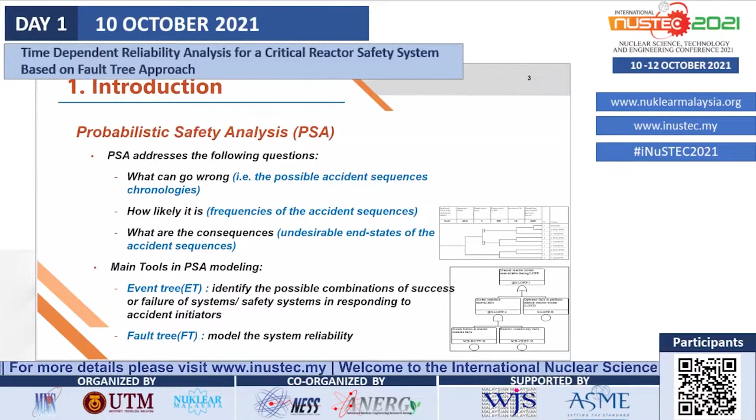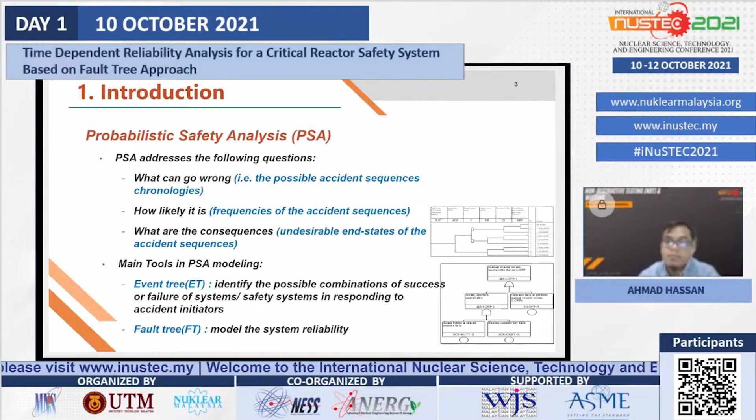And for the modeling tools in PSA, mainly there are event tree and fault tree. We use event tree to identify the possible combination of success or failure of our safety system or mitigation system in response to the initiation of the accident. And we use fault tree to systematically and logically model the reliability of our safety system or our mitigation system.

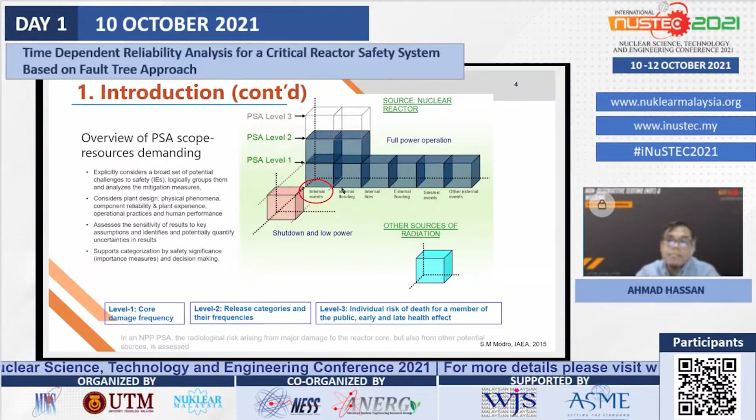And the axis pointing towards ourselves is the mode of the reactor operation if the PSA is performed for a nuclear reactor. And if we consider the inner box, which is the level 1 PSA during full power operation, and the cause of the accident is internal events, the common hazard that is usually thought of is the loss of integrity of the primary coolant boundary, meaning that the reactor is losing the coolant.

So during normal operation, the coolant is not only to transfer the heat, but it is also a protection for the nuclear fuel. So when there is a loss of coolant, or let's say a break, the amount of coolant will be reduced, and eventually, if the core is uncovered from the coolant, the core will become the source of hazards.

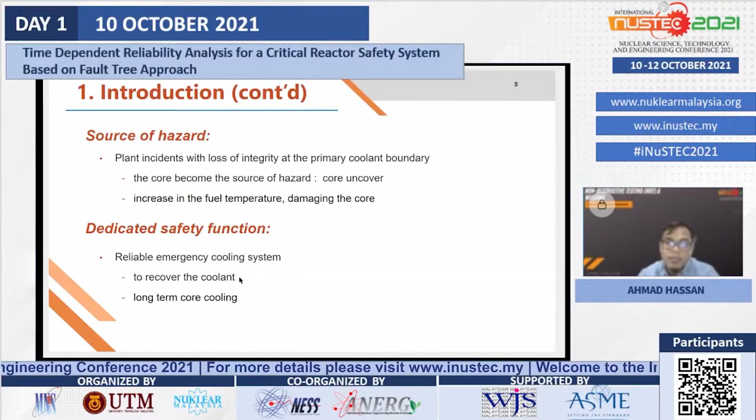Because we will experience the rise of fuel temperature, and after that, that situation will damage the nuclear fuel core. That is one of the reasons why for every plant there is a dedicated safety function to provide emergency cooling function, to recover the loss of coolant inventory, as well as to provide long-term cooling to remove the decay heat.

And so the motivation of this study is to look into the reliability, and specifically how the reliability changes as time goes by, of the emergency cooling system at a nuclear power plant. So this involves the failure mode and effect analysis for each component in the system, and then the construction of the fault tree and the quantification of the fault tree. In this particular study, the graphical construction of the fault tree and the quantifications are performed using the RiskSpectrum PSA

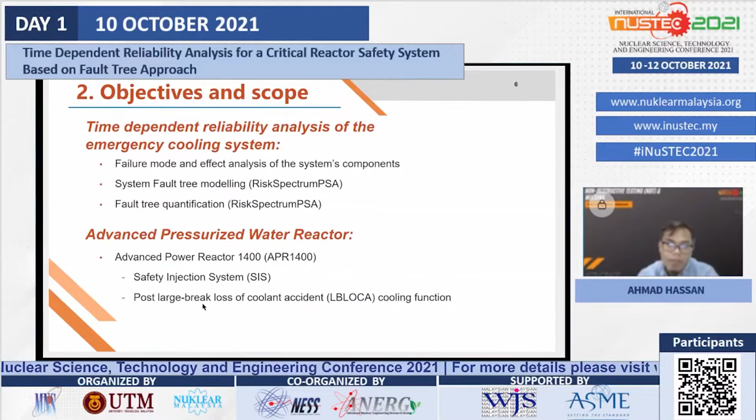computer software. We have selected an advanced pressurized water reactor, the Korean Advanced Power Reactor 1400, or APR1400, for its safety injection system. And the scenario that we analyzed is the post large break loss of coolant accident. So how does the SIS perform during this particular accident condition?

However, the success criterion for the long-term cooling after large break LOCA is that borated water must be continuously injected via train 1A and train 2B, because only at train 1A and train 2B, other than through the direct vessel injection nozzle, the borated water is also injected into the vessel through the hot legs. So from train 1A and train 2B, borated water is injected through the direct vessel injection nozzle as well as through the two hot legs of the reactor.

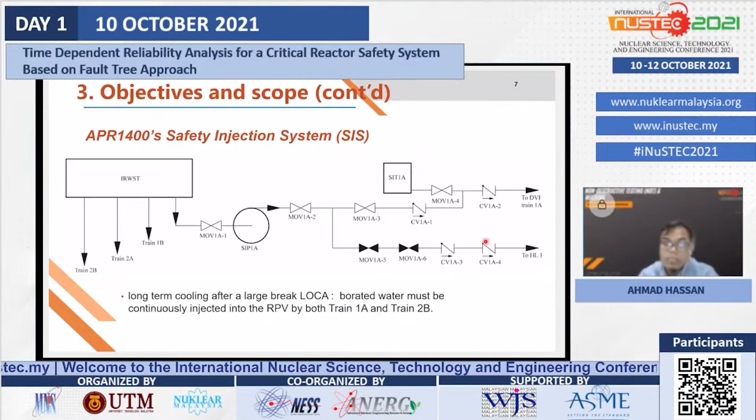Other than the IRWST, in the system there are also safety injection tanks. But for this particular analysis, we don't consider the reliability of the safety injection tank. Other than that, there are a series of valves, check valves, and also importantly, the safety injection pump. So the methodology involves FMEA, failure mode and effect analysis. This is to identify the relevant components, screen out the irrelevant components, and then consider the effect of the failure of each component on the functionality of the SIS during the post large break LOCA.

And for the fault tree modeling and quantification, we use the outcome from the FMEA. Then with the fault tree calculated, we can further evaluate the contribution from each of the basic events. And then also from the base fault tree, we try to look at the effect of operator recovery action on the reliability of the SIS.

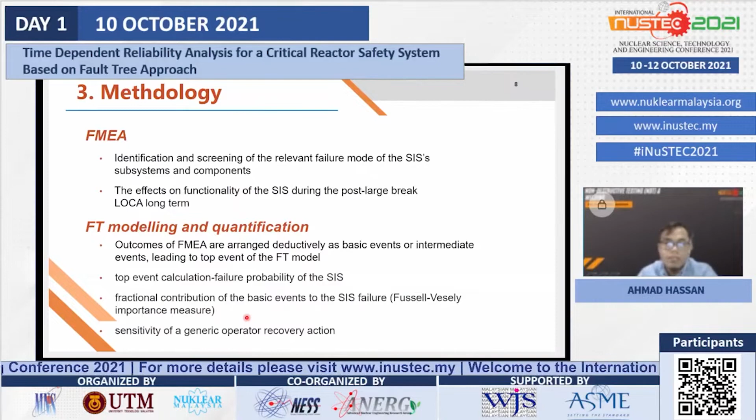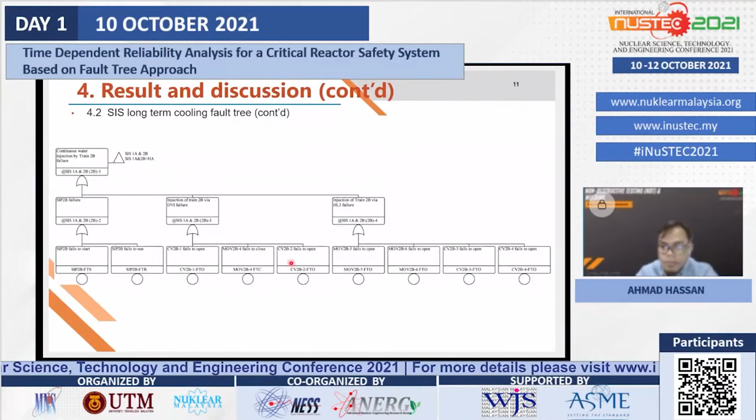So this intermediate event is connected to these three. And after the quantification of the base fault tree, these are the minimal cut set lists that are obtained, especially for time at 30 minutes after the initiation, and the top event. The failure probability of the system is this value,

and unfortunately, any single failure of the basic event will lead directly to the failure of the SIS, and this does not comply with the single failure criteria. And if you can see the top contributor, the safety injection pump failed to start, but in the long run, specifically at 5 hours, the first two at the top are replaced with still the pump, but a different failure mode, which is the fail to run.

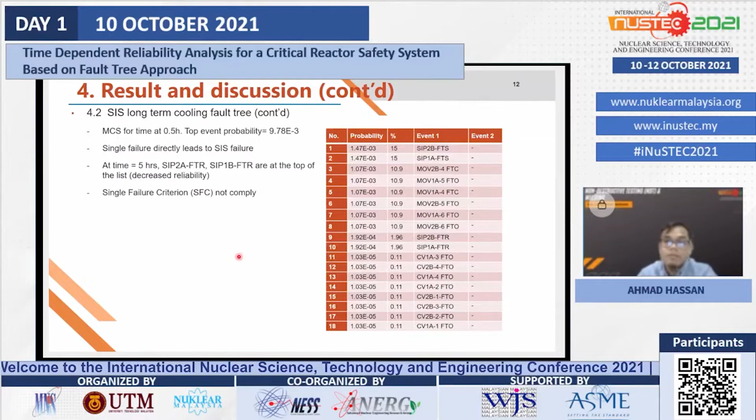Okay, because the fail to run of the safety injection pumps is increasing with time, whereas other basic events have constant failure probability. Okay, so this is the failure probability of the SIS with time, and specifically at 72 hours, the failure probability increases 6 times. Again, the same reason, because of the safety injection pumps fail to run.

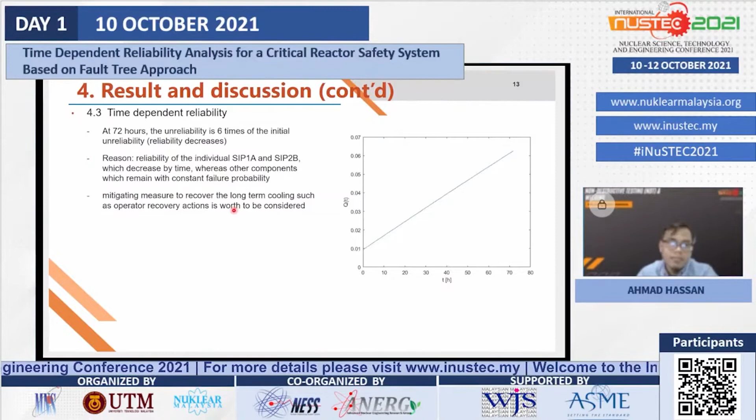Okay. So we can think of other measures to increase the reliability of the SIS, such as operator recovery action. I will come to the operator recovery action later. So now let's take a look at the Fussell-Vesely importance.

So by definition, the importance is the ratio of reduced unreliability or ratio of increased reliability when a basic event is completely reliable. It means that it does not fail at all. And particularly for the pumps, if we can find a way to make it not fail at all, the benefit is 100% increase in reliability. And for the other basic events, their values are not that significant. They are less than 1 per 1,000. So the same reason that I explained just now for this outcome.

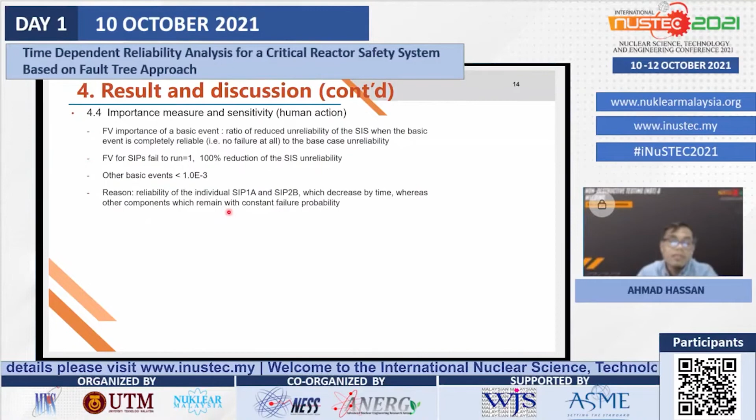Okay, if we consider a human intervention, human action, so this one, it is found out that the mean unreliability of the SIS decreases by 2 orders of magnitude, from 10 to the minus 2 to 10 to the minus 4, by introducing a nominal human performance, 0.011. This is the value from SPAR-H method. And we can see the minimal cut sets now.

We can see the compliance of single failure criteria. So there is no more single basic event that leads directly to the failure of SIS, and now we can see the combination of the human recovery action and the failure of the hardware.

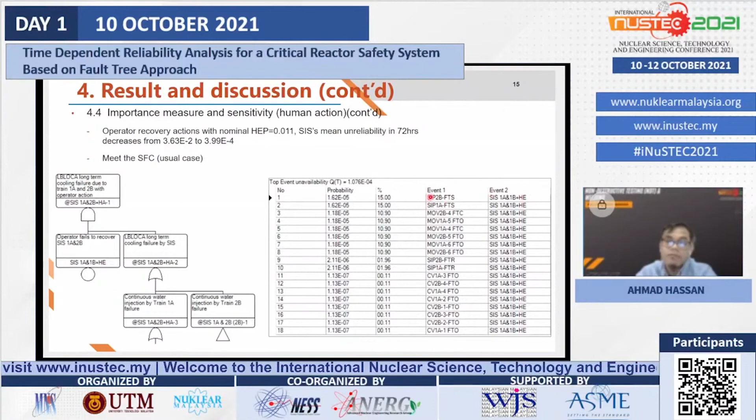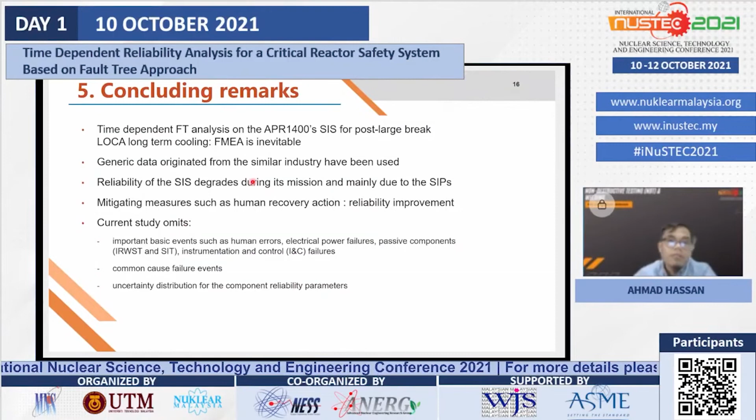So to conclude our work, we performed the time-dependent fault tree analysis for the SIS, and a failure mode and effect analysis was inevitable, and we used data from similar industry from the NUREG document, and the degradation of SIS with time is mainly due to the safety injection pump, and with the introduction of recovery action, we can see the reliability improvement. In practice actually there is a human recovery action, but for the analysis I first omitted the human recovery action, and after that I included the human recovery action to see the effect.

However, we omitted many important basic events such as human errors, electrical power failures, passive components, and the electronics of instrumentation and control. We also didn't work on the common cause failure, and we only considered the mean value of the reliability parameter for all basic events. We neglected the distribution parameters of the basic events.